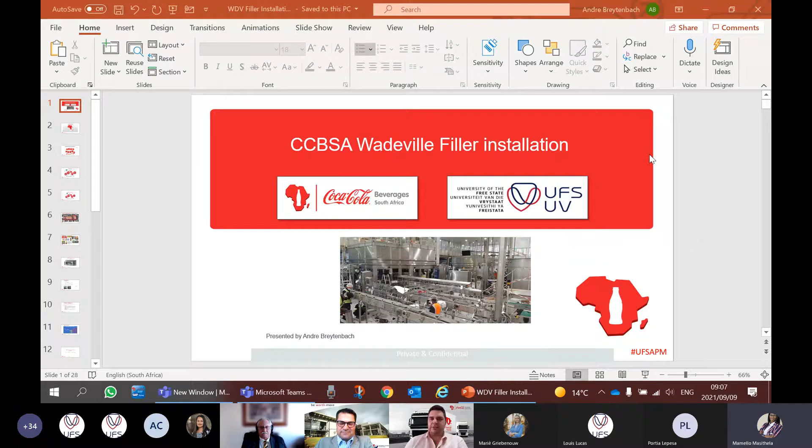The presentation as I'm sharing it now is a very basic and straightforward presentation. It is meant for you guys to enjoy, and just to show you how we experience getting projects like this off the ground in an operation and what we're faced with. I've tried to keep it as visual as possible.

Yeah, 100%. We look forward. Let's go for it. You have a good track record, Andre. Oh, thank you. That's good to hear.

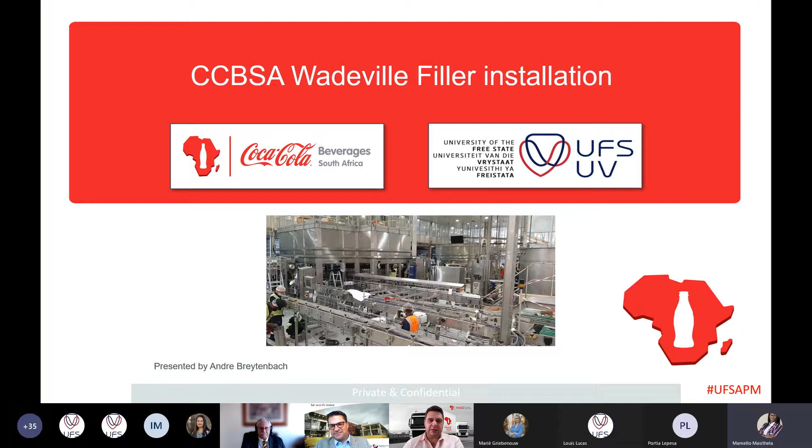Dion, when I retire one day, I've already put in my application. I want to go and retire here, the last 5 years of my life, you know. So hopefully I'm successful and see if it works out.

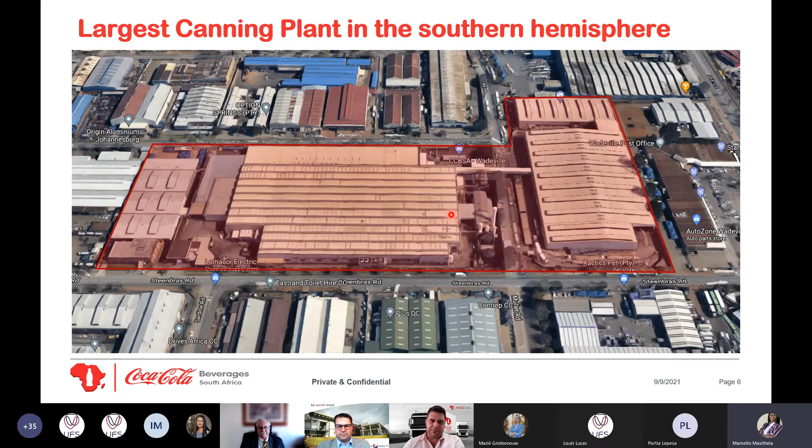We do our famous brand of Coke, and then we've got all the flavors as well. We produce our juices and our waters here, and then the energy drinks as well. And what you'll see is Monster as well. You'll ask me, is Monster now part of Coke? No, it's not, they are a partner. We bottle for them and distribute in the market. So we partner with them to produce their brands as well.

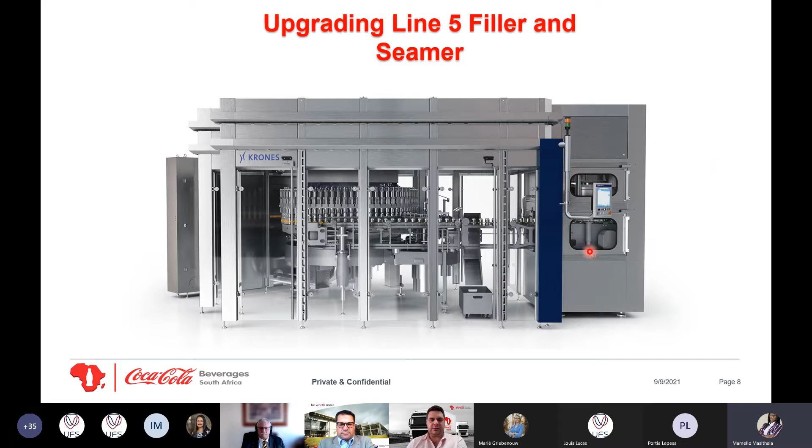And this is what we've basically installed in the plant now. So just a high level overview, why did we do this? Why was it important for us to do this? We had equipment that worked well. Why do we need to change it?

So the first big thing that we had to do was obviously align the can size, the can diameter to the international standard. The can that you see now in the shops is what we had to do. If you remember, there was a big, short, bulky can that we previously produced. So we just aligned to the international standard, and that obviously required a different change part in the machine.

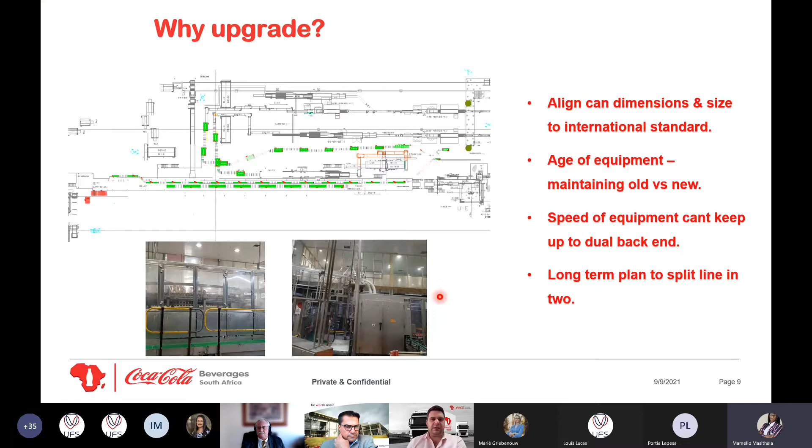And then long term, do we install another filler and split this line up into two? So that is a long-term plan. Not sure if that's going to happen right now, but this is what we're thinking about and being strategic in terms of slowly but surely upgrading the plant.

From a budget point of view, and not getting into too much detail about the costs and all of that, we basically looked at a couple of scenarios. I just explained to you, one of them is just taking the current equipment and bringing it back to basic conditions. What would it cost us? Old technology - and one of the biggest problems with old technology is the change parts and the electronic components become redundant. So if there's a failure, you are forced to upgrade in any case.

We see that happening often in manufacturing plants where you start building up, you've got one old part on a machine and one new part on a machine, and that just creates problems for us. Like I said, choice number 2 was to just install the filler and the seamer, or the double side, but from a cost point of view that was very expensive, so we went for just the filler and seamer.

If I could come in here, and students please join the conversation. When projects like these are scoped, I really enjoy that you started off with why, because we've had several conversations this week about what justifies a project, what is the rationale behind a project, and how you get support for it. I'm curious to understand how this project was flagged by circumstances - it could have been increased demand in the market, or other plants' production capacities under pressure. You run a thorough risk management process within Coca-Cola, so can you give us insight into how this started to surface, and how it got to the point where you had to put different business cases on the table and select the best one?

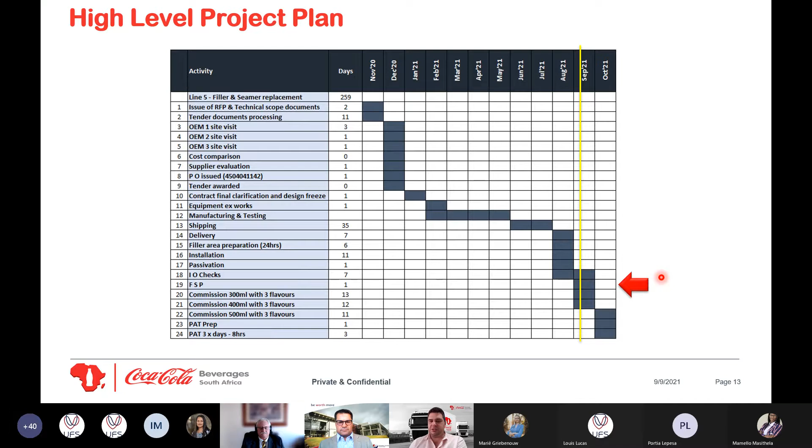We're currently sitting in September. So far, most of the stuff went perfect. Well, the project team executed it perfectly, with some slight hiccups, and I'll talk about that now. And then we basically were here yesterday. FSP is producing our first sellable product. We needed a day for that, and I was fortunate enough to have a quick video on that, which I will share with you guys later on.

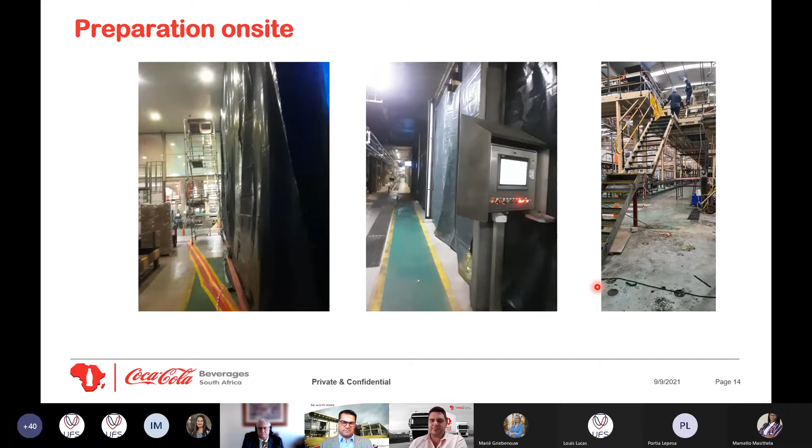And I think 20 years ago, they scoped their project not right, or something went wrong, and they had to lift the filler about 40, 50 centimeters high. That was the cheapest way. I don't know why, but that's the only conclusion we could get to. So we had to now break them down. And part of it is this conveyor is 1.8 meters high as well, and the normal conveyor is 1.5 meters. So this was all the old stuff we had to change with the new project.

Andre, and I assume that's the classical example of something you didn't anticipate and you didn't plan time and material and professional services to remove that, eh?

We actually knew about this upfront. Funny enough, one of the delays, Dion, to get to your question, is we were hiring a normal jackhammer to break down these plinths or pillars that the filler was standing on. And this was supposed to be done in like 6 hours. We had 2 or 3 jackhammers in here. We were ready to break it down. We ended up hiring a vehicle like a Bobcat that took us 2 days to break it down. So yes, definitely a delay; we didn't anticipate how long it would take to break it down.

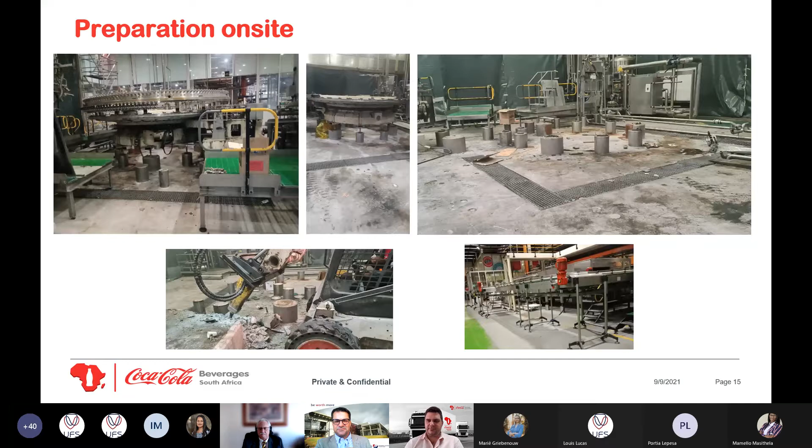But yeah, to your point, we knew about it, but we didn't know it would take that long. Okay, thanks. And this, you can see some of the preparation as well. Obviously, we can't install a new filler on a floor that looks like this, with all the areas. We had to do it properly.

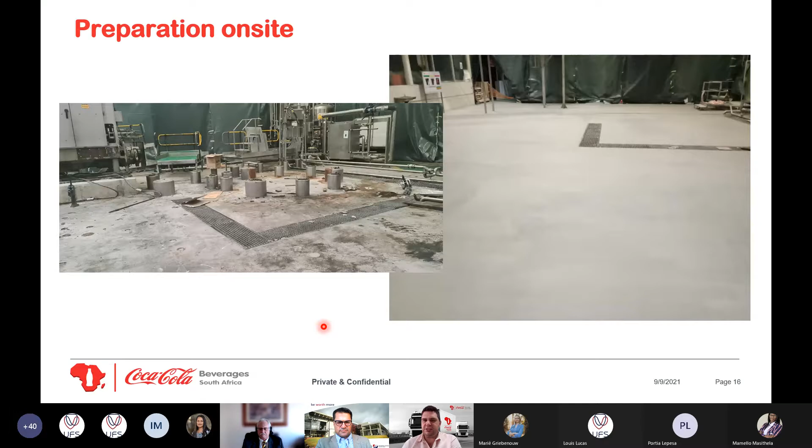Got in a professional company that epoxied our floor. And when we epoxy it like this, it obviously seals it off from bacteria and mold and growth, anything like that. So from a quality point of view, making sure we're adhering to a good standard as well.

And talking about the challenges that everyone can relate to, that influenced us quite heavily, was COVID, obviously, from a worldwide point of view. Now, why did it affect us? Not in South Africa with our people, but the machine was manufactured in Germany. And when the people came out to start scoping the project, the Germans all started getting COVID.

And the company just said, listen, no, we're not going to send our German technicians out. The local guys will do the installation. So that was a big challenge for us. That's not the normal standard for us to install a line. The people that manufacture it are the people that come and install it. So yeah, that was a big challenge for us.

But we knew people in the industry in South Africa, and they were very good, and they did a phenomenal job installing the project, which gave us a lot more confidence in them going forward. And then obviously a very famous picture that you're all aware of in KZN, we had the riots and the roads.

Now, why this affected us: the ship was bound to dock in Durban, and I'll talk about that later. And a week before this, the riots happened. And you can just imagine the delay in the harbor, because the containers were not leaving the harbor. So the ship was delayed a good week to offload.

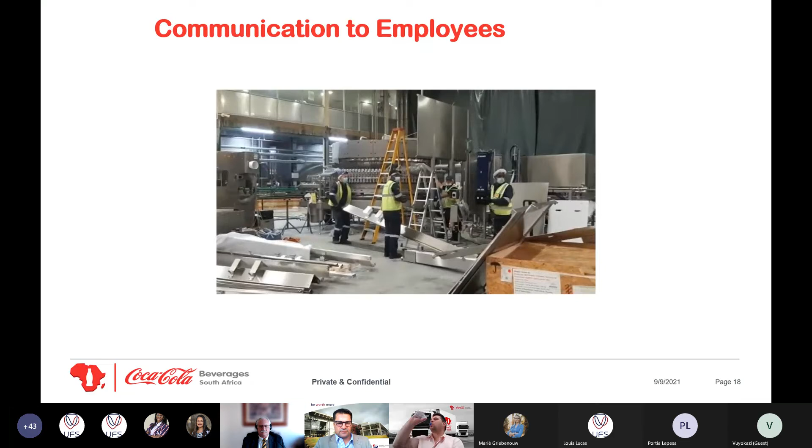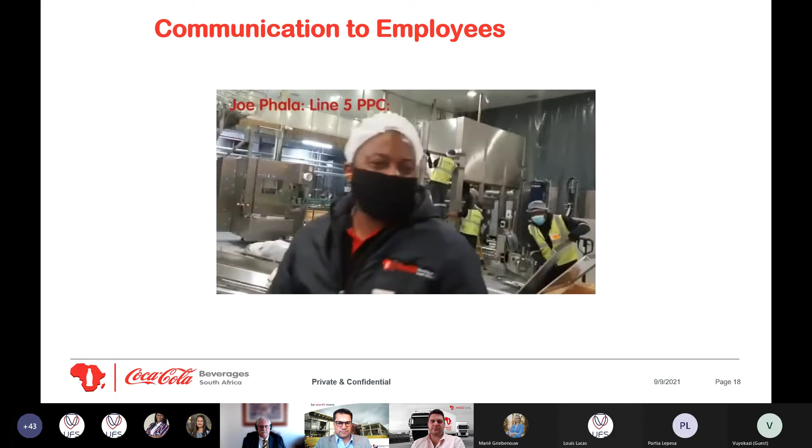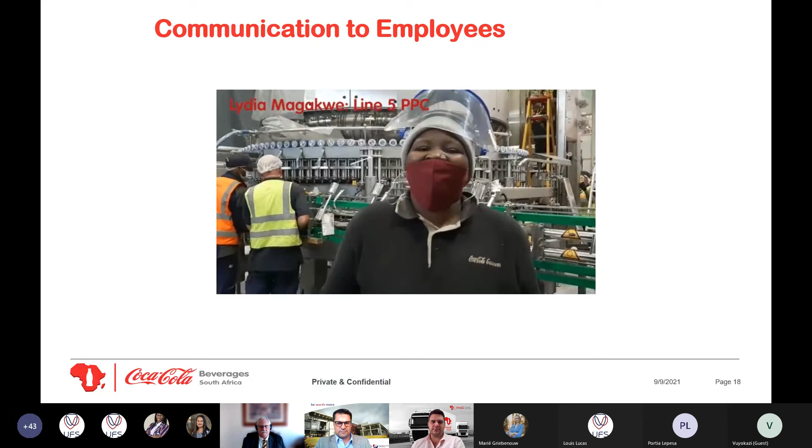I hope you could hear the video or the sound of it. I'm sure you did. But it's just one of the examples, a simple short video that gets shared via WhatsApp messages to everyone, just to keep them updated on everything. Sorry.

So we talked about the container that had to arrive in Durban. Now, just to give you some background, when the riots happened in South Africa, the ship was sitting in the harbor and it couldn't get offloaded. I think it was about 3-4 days. The ship was just sitting in the harbor, or just outside of the harbor in Durban, waiting to be offloaded, and there was a massive queue in the harbor itself as well.

Just one thing that I've learned from this whole project, a simple app that I downloaded from the Play Store on your phone made it easy for us to see how far things are going, because we couldn't always get hold of the people in the harbor. And when we got hold of them, they didn't give us an exact answer on, okay, the ship is next in line, it's going to come in the next hour. We didn't get that type of information. So we just resorted to our own way of trying to find stuff like this. And like I said, a very simple app on a phone gave us the opportunity to do this.

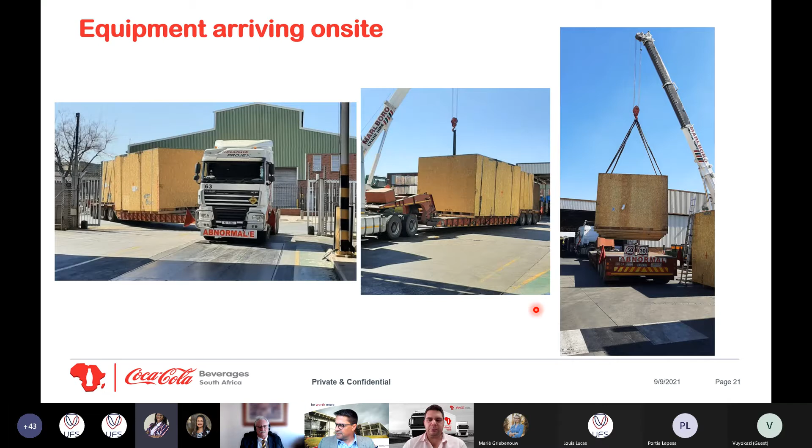And this is how the product looks like, how it arrived at site. Big, massive container that had to be offloaded with a crane, and then it got placed somewhere where we could then unbox it and check that everything is right. So this is also some of the equipment that arrived on site. We had a whole area just dedicated for this equipment to be staged and for it to be assembled.

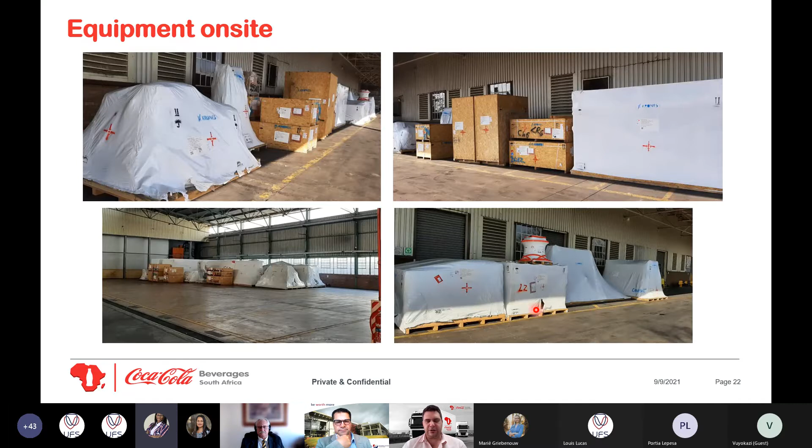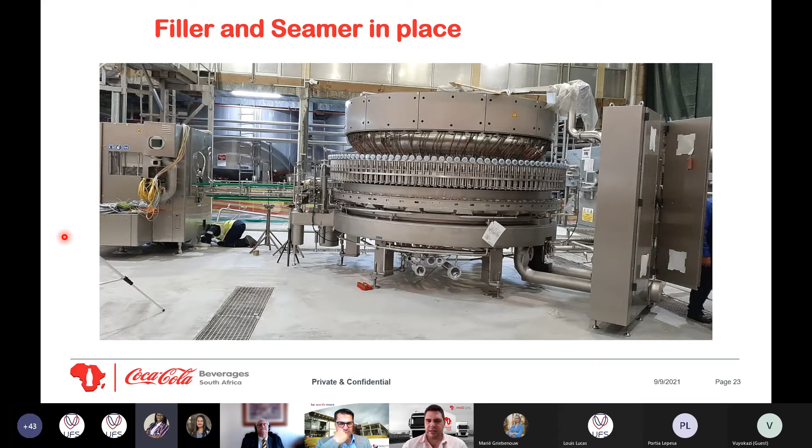Now we've got 120 valves that fill a machine, and I'll show you a video. This machine fills 96,000 cans per hour. So you can understand why we wanted to upgrade the equipment.

And there's a later stage of the machine. You can see the filler inside there. And there's just some safety covering for the rotatable part so that someone doesn't get injured when they work close to it. And then the conveying as well.

From the machine in, you see all the cans go in there. It comes down a chute into the can, this conveyor into the machine, and then it comes out your seamer. Your seamer is the equipment I told you about that seals the lid on top of it, and then it goes out to the back end. So all of this work also then taking place.

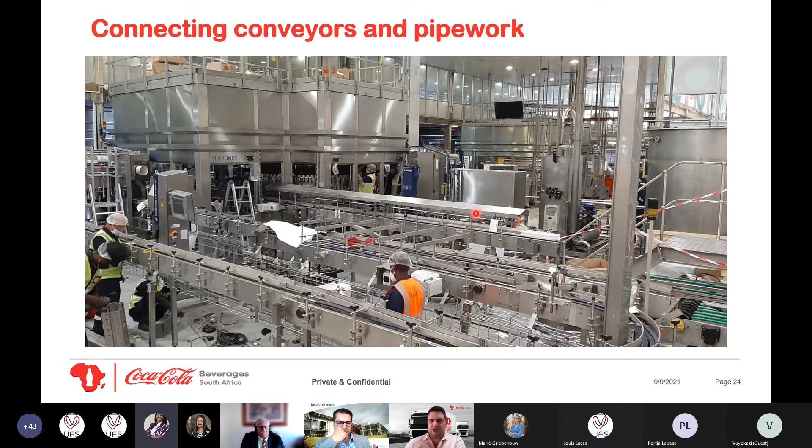And something interesting, just from a quality point of view, we normally make sure that when a machine like this starts up, it's not just start up and produce. From a quality point of view, we need to test the equipment first. And one of the interesting quality tests that we are doing, if you look closely into this can, you'll see small granules. It's actually polystyrene.

Small polystyrene balls. Now you would know polystyrene is basically static, so it will cling to anything. And this is one of the tests that we do to make sure that we do.

Now, I mentioned previously that we had a can rinser that rinsed the cans with water. That was very effective. But as a company, we want to be energy efficient, and we want to be sustainable as well. So we've installed a rinser, a piece of equipment that actually blasts this can on the inside with sterile air and then removes all particles. And this is part of the test that we do.

So you'll see it comes in, then it gets turned around, and then it gets blasted from beneath to get all the particles out. And once that can comes out clean, we know we've passed the test, the equipment is working well, we can start producing.

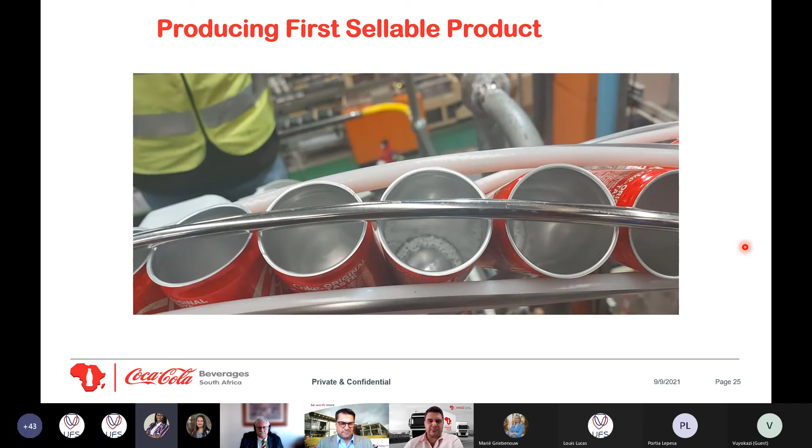Something interesting, how we've done it. So I want to show quick videos for you guys. We're nearly done. Dion, you must just keep me honest on time as well, but we're nearly done. You're doing great, thanks. All right.

From a time point of view, what we do over here is everything is installed. We call it a dry run. We physically switch on the switches and we see if everything's turning, if we most probably didn't forget a bolt or nut somewhere. And this is how it looks like.

And once this is done and everything runs for a couple of hours, you can see 96,000 cans per hour. And then it runs, and everything works well. There's no clashing parts. So the technicians have done a phenomenal job getting this machine installed in a very short space of time.

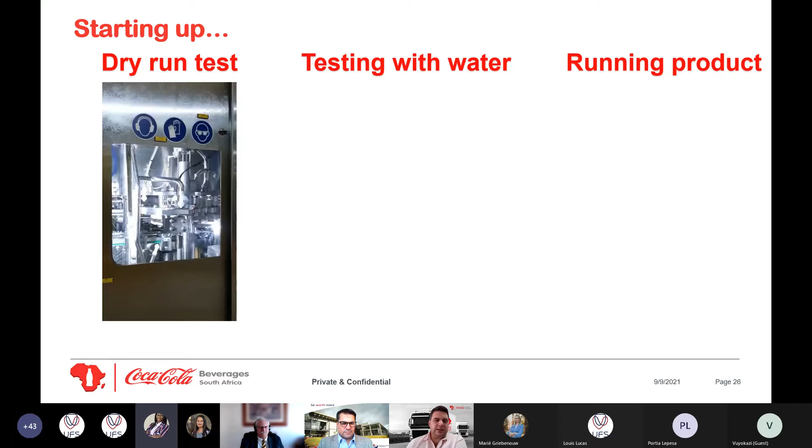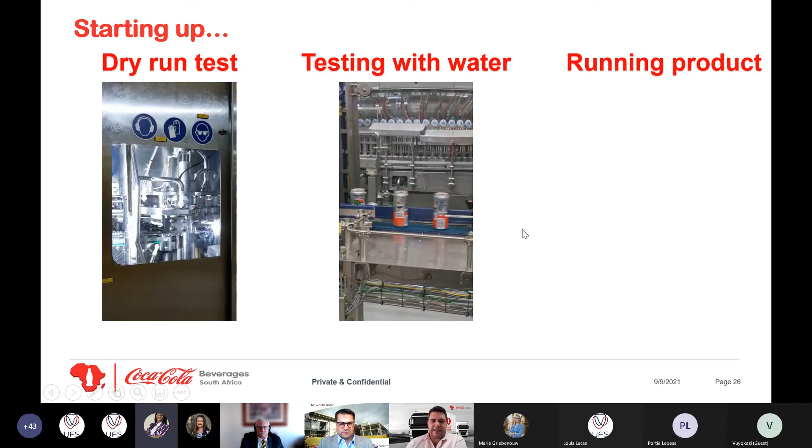The next test that we do is we take a couple hundred cans and we start the whole process of simulating filling a product. What you'll see here is basically Fanta cans being filled with water, just to see if the whole filling process works. We then take the can and we analyze it, see it's on the level, and if everything is done properly. So that's the whole process where we just fill with water, test the machine as well.

And then the next step is actually filling it with product. This is our first sellable product that we started running. This was actually done yesterday. We're still in the process of completing this, but yesterday we actually got it right to produce the first sellable product. I'll quickly show you how that looks.

Just to show you guys how the filler runs, it's actually running at 50% capacity. I'll just take it back a bit. If you have a look again, so that's at 50% capacity. Normally when it runs, you struggle to see what's written on the can, that's how fast the machine runs.

Yeah, and then what's the next step? Andre, sorry, go back to the previous one please. Those cans lying on the floor, are those all rejects? If the filler finds an issue, does it just eject it, or what is it? You weren't supposed to see that, Prof. Oh, I'm sorry, I didn't see it. That's poor housekeeping, and I was cautioned about it when I presented it to the team. But well done in spotting that.

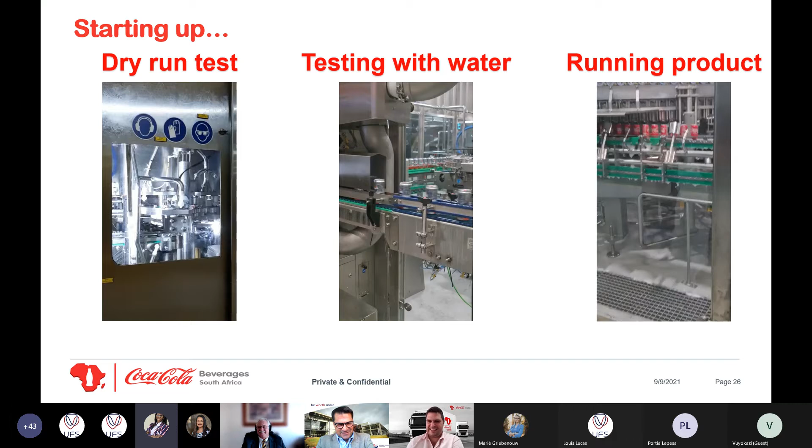So what's the next steps for us? We are producing, so just to check, the old machine was only producing 300 mils. We want to introduce more pack sizes to be more versatile and make sure we can keep up with customer demand. This is the type of technology we talk about, we don't need a dedicated line for a specific pack size, we want to change between pack sizes on one machine, which makes it more profitable for us.

Because it's new equipment, our production process controllers who operate these machines need to be trained on how to do it. We've got a process called autonomous maintenance, which means these guys do daily cleaning tasks and observations on the machine to make sure they last long. They need to be shown where and how, part of it is greasing the machine and making sure the lubrication is fine and the parts are turning. Then, for maintaining this machine, our whole technical team needs to be upskilled on how to maintain this new equipment.

The next big thing, the rush from today onwards, is to fill up the gap we've eaten into in the stock build. For the next 10 days we will test 300 mil production, then 10 days after that we're going to test 440 mil production. We've planned about 8 days for the 500 mil cans as well, though I doubt we'll get to that now because that pack size isn't in big demand, it's more your 300 and 440 mil that's the biggest demand. So we'll focus on those now, for the essence of time, to make sure we get through our busy season and fill up the stock level.